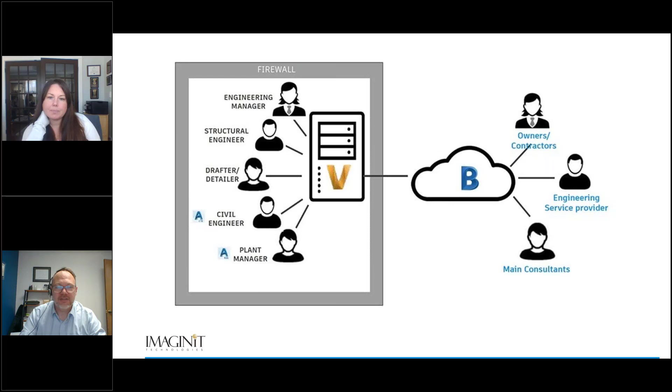We're not going to get too deep into the how of that, but that's the idea behind it, is we're linking some of this together. Now, another tool that I'll be leveraging, and it's just a feature within the Autodesk platform, within Inventor, is this idea of AnyCAD.

If you've heard of AnyCAD, it's the idea of bringing in maybe a SolidWorks file, a Dassault product, or bringing in some Creo or NX, and we can link it in and not change the original format. So it's not an import, it's linking.

Interestingly enough, up to 2021, one of the pieces that was missing was linking to Revit. So we couldn't even bring in other Autodesk products. We could bring in all these competing ones, but not Autodesk. So with 2021, we have the idea of linking Revit files in.

And this is, I can work with them, and that's part of what we're going to show, is how we're going to leverage this, bring this in, and begin working with this a little bit. So that's going to be a key piece for me.

So we're talking about a lot of different tools here, and I wanted to make sure we had a... okay, I'm going to step back, I'm getting too far ahead of myself. So what we want to do is walk through kind of how this would work, and it tends to work in a lot of places that I've seen. So I'm actually going to stop my webcam because we're going to get into some of these different pieces, and I don't want to distract myself as I go here.

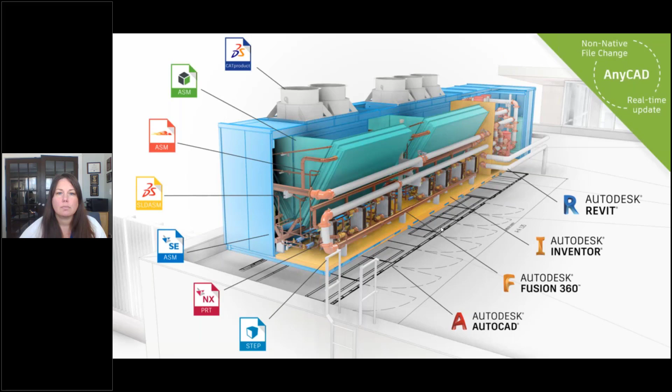But here's what I'm going to do, this is be really common. The role I'm going to play is a manufacturer, and I come in and check my mail, and Adrianna has sent me this. She says, hey, good morning Caleb, I've got a cabinet that needs to be customized for a project. Let me know if Caleb Designs can give me a few options. You can find a partial 3D of the office here.

So I'm going to stop there for a moment, and now I'm going to share my desktop, bring up and take a look at this file. So this is really common, right? The way that this workflow would typically go is it starts out in email, something goes along. What I would expect would be a PDF file, and that's probably the most usual way that these things get shared.

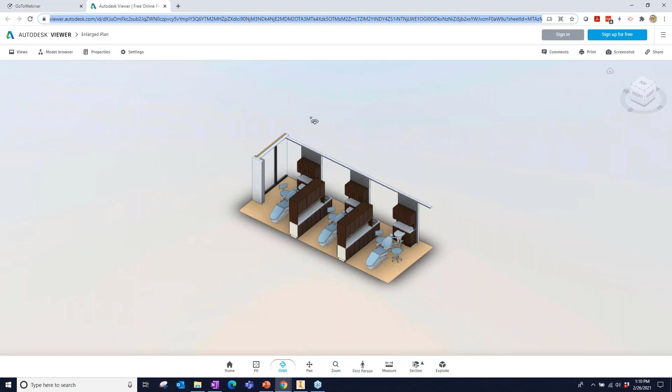But I'm going to drop out of this a second, and I'm going to pull up that link that she sent me. And yep, I'm still sharing my screen, I just want to make sure. I'm going to pull up the link that she sent me. And this is Autodesk Viewer. So she created a shared view within Revit, and now I'm in here taking a look at the Autodesk Viewer.

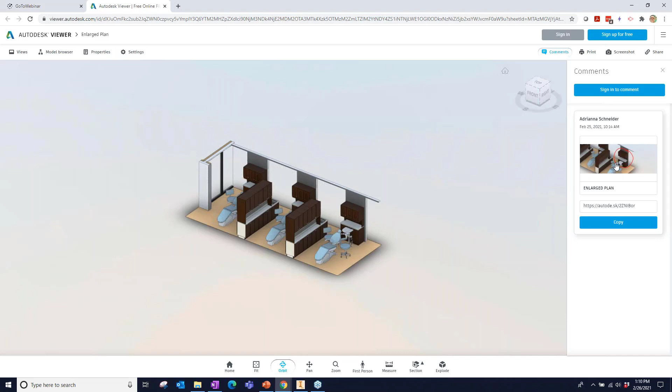Now, in the email, she mentioned the outlined in red cabinet, and if I take a look, I'm not seeing an outlined in red cabinet, but if I go over here to my comments, I have a comment that she's created on here with, sure enough, an outlined in red cabinet. So this is what I want to focus on. This is the area that I'm going to kind of take a look at. And as a quick pass, as a, hey, we want to start examining this a little bit, and do you think you could build this, and this is what I want to show you.

This is a pretty slick way to do that. Now, when she exported this, she also gave me the ability to come in and grab some dimensions off of here. So it is possible that I have enough information here to begin giving a quote for something like this, right? I mean, but if I take a look at this, I might want to be a little more precise.

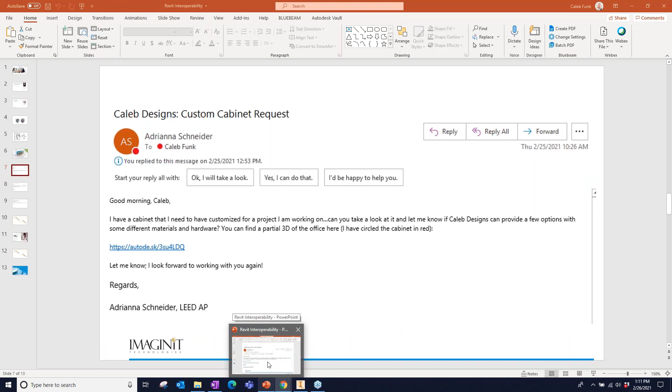Instead of looking at this, you notice all these are approximate values, and I'm clicking close, so I'm getting close. I get a sense of this. This is good. If I wanted to, I could go ahead and comment back and pass that information on. But instead, what I'm going to do is come along and say, you know what? That sounds great.

But Adrianna knows all about BIM 360 and all those things, so she says, you know what? I'm going to give you access to that BIM 360 site. You're good, let me know if you have trouble. So now I, as the manufacturer, can leverage BIM 360. I can link to it with my Vault. And again, broad strokes, we can get back into it later, but we can link into it and begin to pull that out.

So this idea, this workflow that we have here, is what we're going to be working with and a little bit of how this is going to go. So Adrianna, I'll have you talk through the idea of the architect, what you would do, how that would link to BIM 360, and I'll talk about pulling it into my side.

Yeah, so we're currently in design. For those of you familiar with BIM 360, I'm utilizing BIM 360 Design. I'm able to publish my project file over to the document management side of things and share that with Caleb, actually give him access to that BIM 360 file so that he can go ahead and download it. It's that straightforward right now.

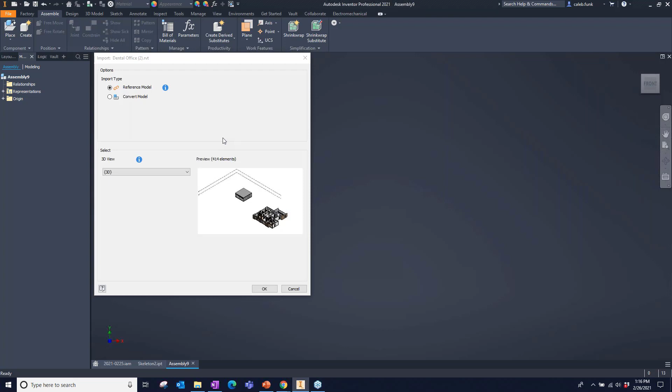As we go through, you notice I can reference the model or convert the model. What I want to do is reference that. By referencing it, I'm maintaining a link to it. And this is true of AnyCAD across the board. Reference is how we invoke AnyCAD. It's not a button I can hit, it's not something I turn on. It's just by referencing it that I get to use that feature.

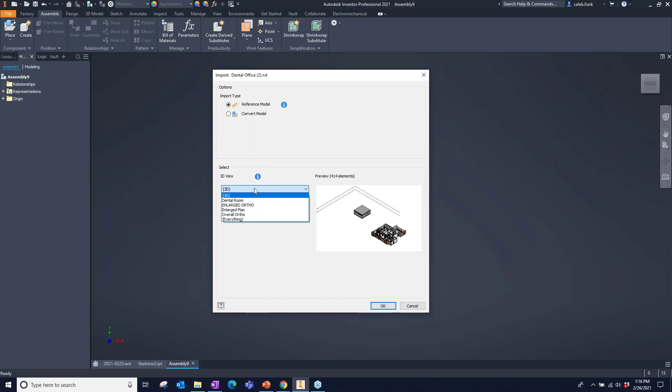As I go through and take a look at these different views that I have in here, Adrianna was kind enough to give me one of these, so I've got a simplified version of that. It tells me you've got 414 elements in here. You can load that in. As a manufacturer, I am most likely concerned with one area of this building, one component.

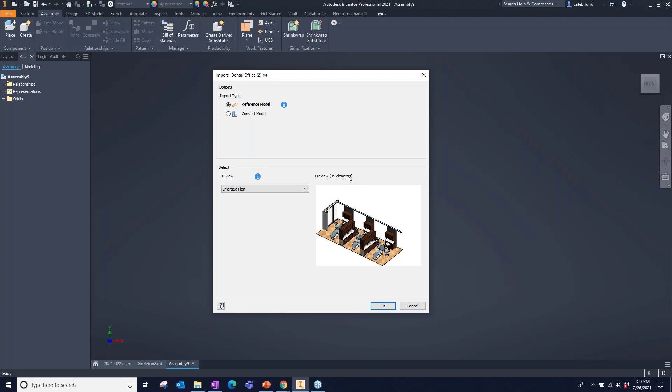Now interestingly enough, some of our colleagues are doing a larger system-wide integration, talking about Revit and Inventor. This is more of a point product type of thing. So there's a whole dental office - I do not care what door she's using, I do not care about any of that. What I'm looking at is just this idea.

So she was kind enough to give me just that view. That's a view generated in Revit. I can get right down to that view, and I'm going to bring it in. Now, one thing that always surprises me about the way AnyCAD and Inventor work is how quickly it imports this information. It's a lot of info, and it brings it in right away.

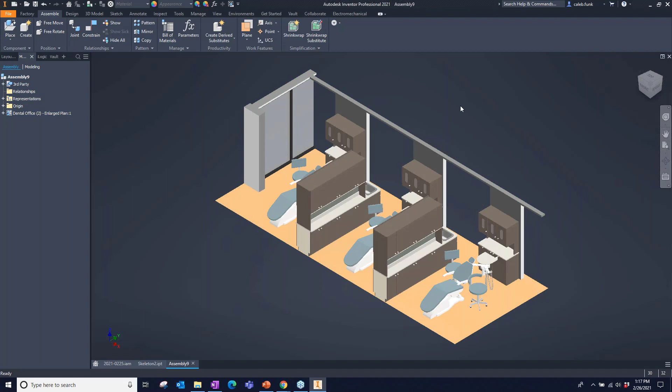I'm just going to kind of drill down here a little bit. Like I said, I've been doing this for years and it still impresses me. I enjoy it so much when I see things like this. It's bringing in each of these different areas.

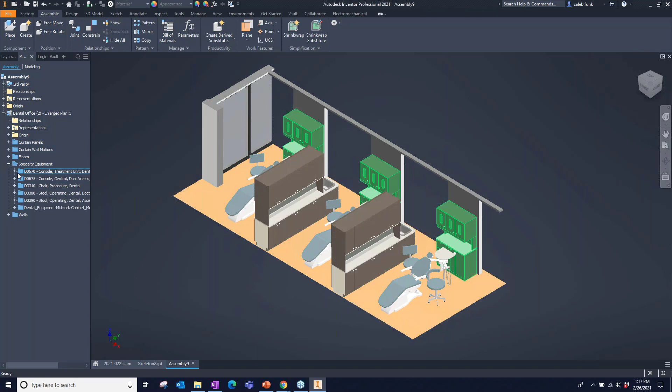Adriana, I'm not that familiar with Revit - in Revit, do these show up as different folders within Revit as well? So it's not really how it works in Revit, but each one of those is its own individual component, its own content, yes.

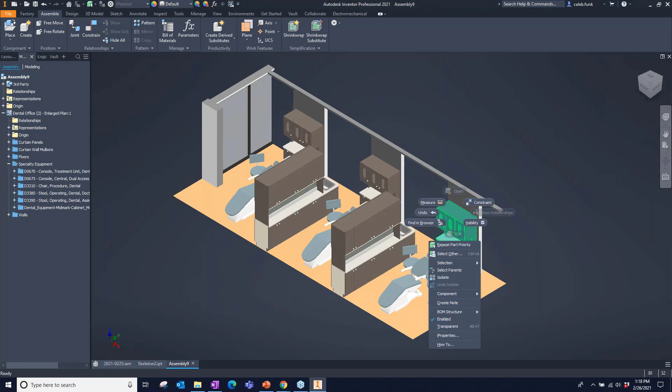So I can drill down to the individual content, the individual pieces that I have in here. And all I'm really concerned with is one piece, right? So I'm just going to real quick say, you know what, I just want to go get this one part. And I'm just going to kind of cheat a little bit basically and say, yeah, get rid of the rest. That's all I'm concerned with, I just want to look at this one component. So I could use the tree, turn them on, turn them off, and view that.

I think it's interesting that Revit doesn't have those folders and that this is somehow magically working within Inventor. I applaud Autodesk on that. I think that's a great way to access that information.

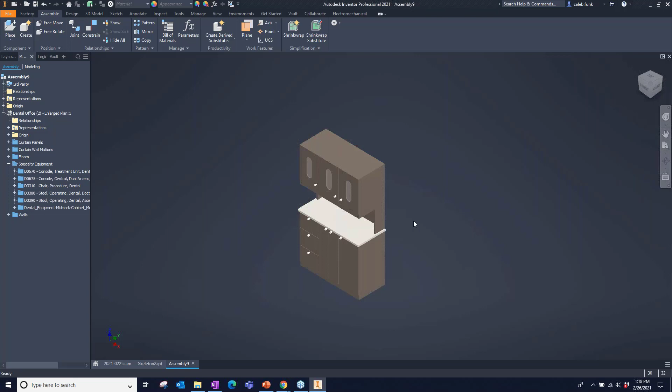Now that I have the content, what can I do with it? And that becomes one of the beginning questions of, how do I even - it's here. It's one kind of chunk, I guess, from Revit. In Revit, this would be a Revit family. So it's a piece I have in here.

Well, I do have all of the simpler things I can do where I can come along and measure pieces off of it so I could get those precise measurements. I could at this point create a drawing from this and pull measurements off of it that way. One thing I think is kind of neat though is that I can use this if I want to begin doing a layout of this, if I want to borrow geometry off of it, whatever it's going to be - I can do that fairly easily.

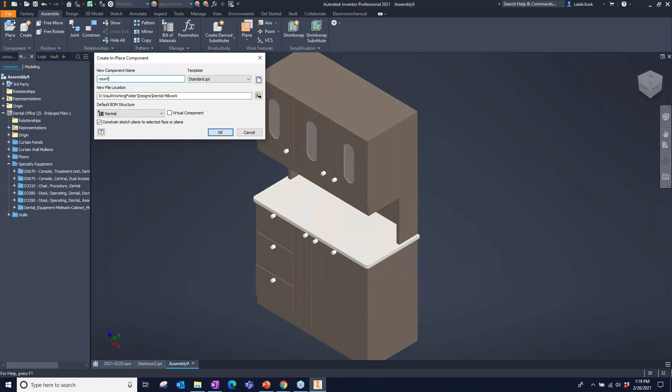So if I come along over here, I'm going to say I want to create - and I'm going to create a countertop. Helps if I spell it right. So I'm going to say yeah, I'm going to go ahead and create a countertop out of this. I can work right in position here, so I'm going to go ahead and do that. Create a sketch on it.

And now it's going to act like any Inventor part that I've brought in. So at this point, this is completely as if I'm working right within Inventor with any other component that I have. I can now project the geometry off of that - let's see if I can grab that whole thing at once. I can project the geometry and begin building components.

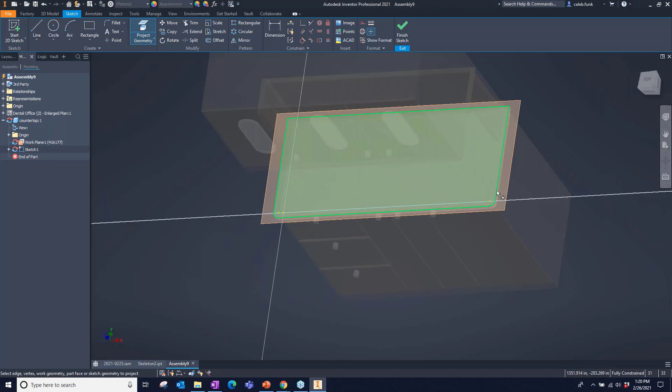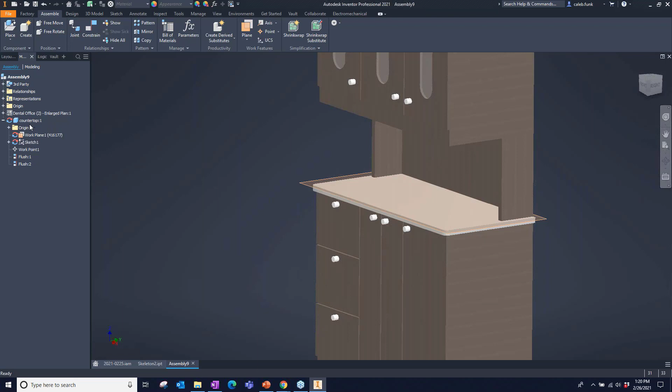In this case, I'll take that and extrude it. I can go grab that underlying layer, and on top of what I have, start building the different components so I could send them off to nesting and manufacture them. I can work right down the line and build its own separate piece.

Completely leveraging the Revit geometry that I have. Now I'll get a little deep in the weeds. You might have noticed that geometry, when I borrowed it, was yellow. It wasn't standard, it was linked to that component. If the underlying Revit geometry changed, I could update it and watch the change in here.

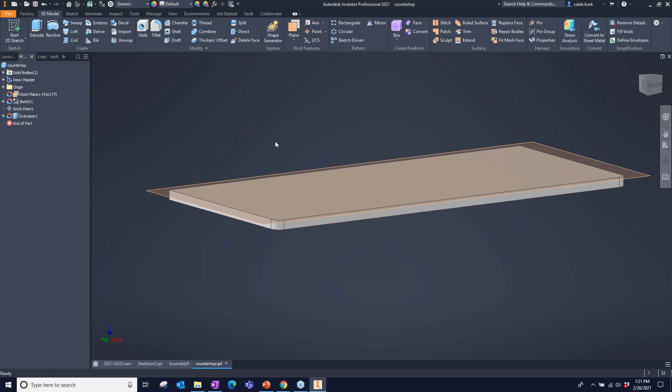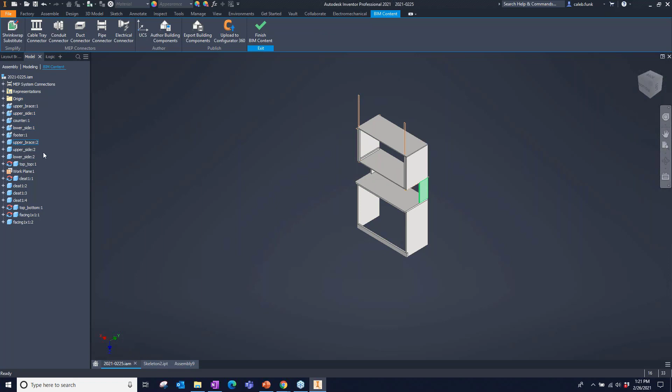Now I'll throw a couple other quick things at you about working with this. In this case, I built this part right on top of what I had there. Realistically, if I'm going to work with this, I want each of these pieces to be a separate component, with all of these little separate pieces, so I can begin constructing off of that. Let me step back and give you an idea what I did.

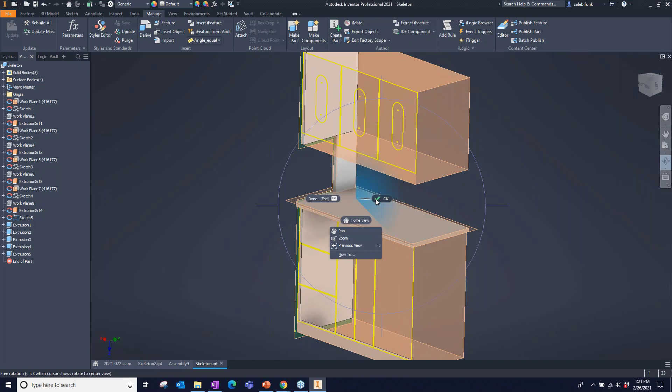If I can find my skeleton, here's what I did. I took that basic cabinet that was there and created a whole bunch of surfaces off of it to use as a master model. Once I had those, I could take it in here, begin pulling pieces off of it, and now I'm kind of finishing it out.

I've got my toe kick where I'm putting in different cleats that I'll have as part of this. I have my nail backers, I'll be putting in my doors, my different pieces. So this is what I would need to begin manufacturing this. I've got it all laid out, I've got my pieces, I've got my bill of material information that I can pull off of it. And all of that came directly off that Revit model.

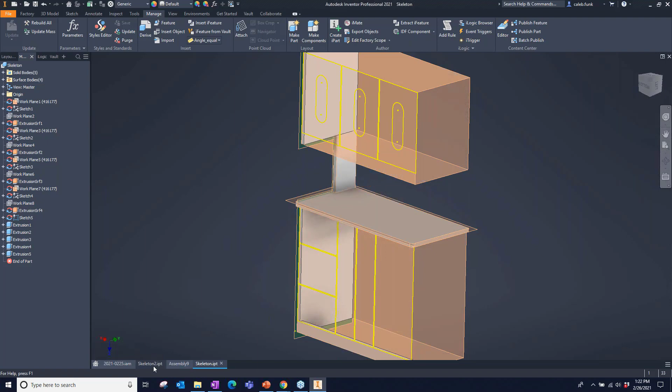In my case, I started out just borrowing those basic sketches so I could create the rest of the information. However, once I've gone through and created all my custom information, send it out to nesting, send it out to WoodWOP or whatever I'm sending it out to, so I can begin generating my code and cutting these up and assembling them, that's Adriana doesn't care.

What her concern is, she wants that information placed back into her model. She's like, this is a custom one I'm creating, she had a placeholder, I've now gone through and built it up, and I want to send this back to her. So there's two sides to this: one, I'm able to leverage the existing Revit information to build my stuff. But two, I want her using my models. It's a great way to begin building that relationship, like, yeah absolutely, let me get you that model.

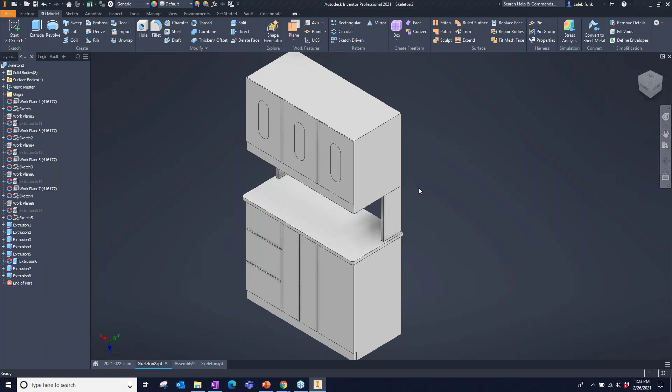Again, I'm just going to leverage what exists today within the Inventor tool. This has been around for a while, a series of things I can access, and I can send this across. So what I'm going to do is take a look at the environments, and I do have a BIM Content Environment.

This has been around for a little bit. If you've ever clicked on it, even accidentally, you come in and you're like, what? Duct connectors, pipe, electrical, I don't know what this is. Most of this, unless you're specifically building something that interfaces — and I mentioned our colleagues doing more of a system thing, they're going to have devices that link into building systems, that becomes useful then — but in my case I don't care. This is going to sit up against the wall, it doesn't have to have duct connectors or conduit connectors.

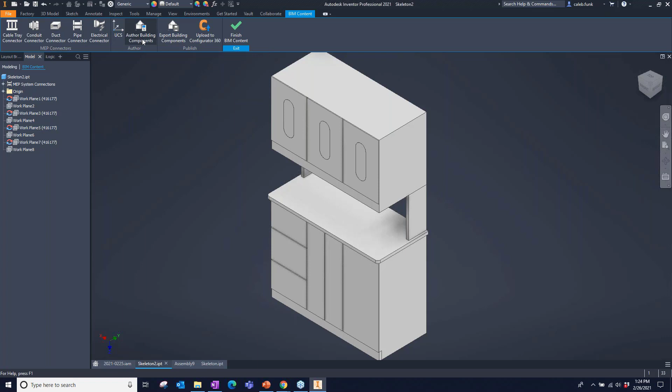What I am going to do is position it — actually I'll position in a second — I'm going to author this as a building component. So I'll say, all right, we're going to set this up. And then this pulls up and gives me a couple of different things here.

So when I take a look at this, I get to give it a 0 point, and this to me is key. If I give you one tip today when creating information that's going to end up in Revit: Revit has a different XYZ. Sometimes the Z is always up; a lot of times when we're working, the Z is out toward us. When manufacturers are working, when Inventor guys are working, the Z comes out toward us. So a lot of times I have to reposition that, and I can do it with the UCS, I can do it with what I have here.

The other key thing I can do is come along to this OmniClass — I vaguely know what it is, it's a way of understanding how. Is this keynotes? What does this end up being, Adriana, on the other side?

No, that's the OmniClass number. What is the OmniClass to you? For me, I'm picking it from the list, which is great. But what's the OmniClass on your end? Does it go into... it could be incorporated into specifications if necessary.

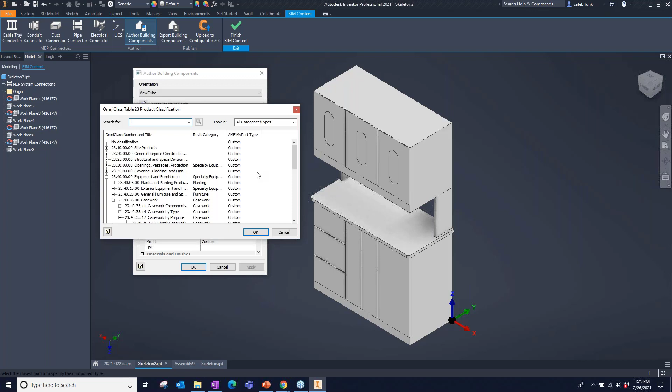So this is basically the spec that I'm giving it, and I'm defining that the spec I have is going to be a dental casework. Part of the dental casework spec, I've got my dimensions that I can plug in, my description information, finishes that I want to put on it, simple things like that. I've got some of this information in place, and now all I really need to do is export it.

So author just sets up all this information. That's what I'm doing, I'm defining it, and then I can come along and export it. What export allows me to do is take this information. I've done it once. Give it my code here, 210226. I can then take that information, and when I save it, it saves it as a Revit family.

So a Revit family, and I'll have Adriana explain a little more in a bit, is how stuff gets put into Revit, right? So this isn't, there's the idea of saving it as a Revit file. I effectively am, but it's a very specific one.

So I'm going to go ahead and save this out. And away it goes, and it goes through and does whatever magic it needs to in the background to create this Revit family. But it takes my Inventor information and puts it into a format that can easily be brought into Revit and understood and worked with within Revit.

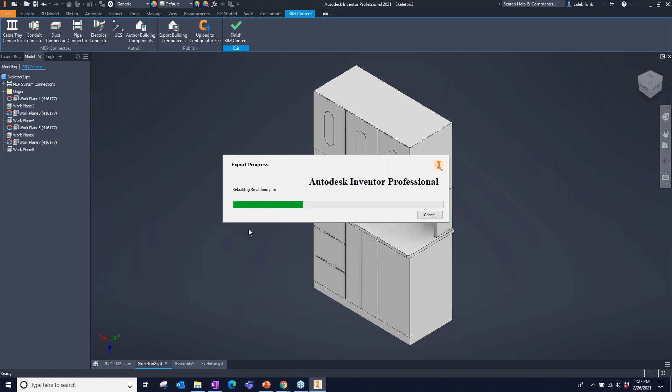So I'll let that run just for a second here. I am going to grab my vault, because ultimately I'm going to take this file and place it over in my vault.

I can see, yep, that sounds good. So just click, it says, hey, look, this was fine. Do you want to take a look at your translation report? And I'll say, sure, let's go ahead and take a look at it. So this just describes what I did, the information that went out. Are there any parameters that went along with it? Basic information. Anytime, if you've ever translated anything with Inventor, it's the same translation report we would always see.

So I'm over here, I'll log into my vault, and I want to check this information into my vault. Now, since it's a Revit family, I don't have a direct integration. I can't do it from my browser, right? I can check this file in.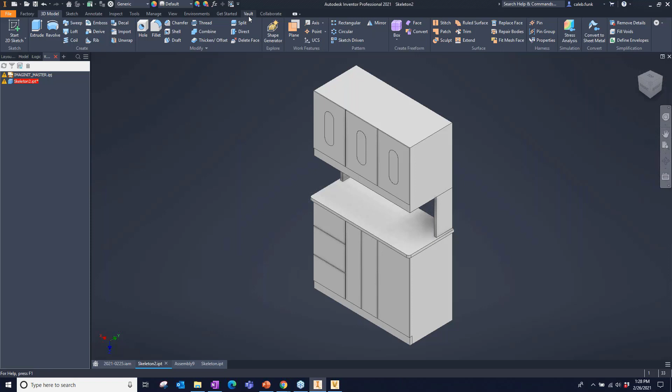Where's my vault content? Let's finish my BIM content there. There we go. So I can go ahead and check this file in, but it's not going to check in the components that go along with it. I need to log into my vault here real quick. Yep, sounds good, so I'll just do that separately.

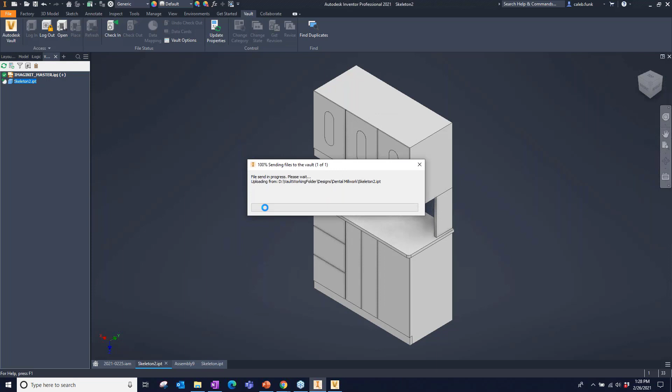And the reason I'm checking it into my vault, I'm not even really going to manage it, but since I have it linked to the BIM 360, I'll save it, check it in, please. So there we go. That's where the handoff is. I can then shoot off an email, say hey, I checked it in, check your BIM 360 site, it's going to be there. I don't have to pack it up, I don't have to email it. It'll just be available as part of that.

So while I have that folder over here for that, let's refresh, that dental casework folder is over here. The dental millwork, I'm sorry. I've only got the skeleton as part of that. I'm going to go ahead and add in that file and just drop that RFA in there for her. So we'll grab it, sounds good. There's the RFA, gets added in.

And it's going to tell me it can't do it because it thinks it's linking in a Revit file. So that's fine, I'm going to cheat for a minute here. And then I'll check that in. So I'll add that file in.

Sounds good. So once I add that in, I'll let BIM 360 kind of pick it up from there. There's a link to that, and that's something that we can set up.

It's one of our administration options where we can go through and set up the collaboration link where we've got cloud drive mapping. I'm not going to get too deep into this, but we can go through and take a look at how we can link cloud drives to that, configure the settings and when it's going to do it.

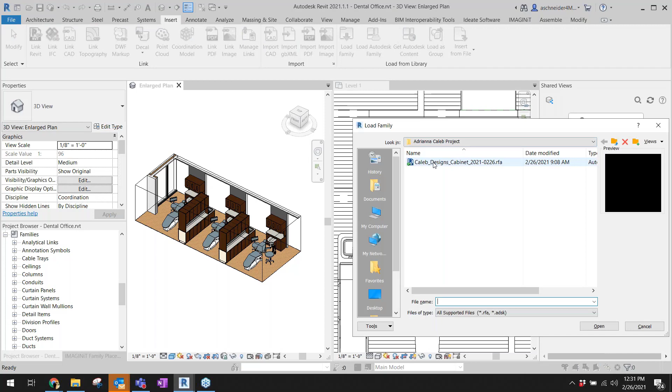So absolutely excellent, loving it. Now that everything's updated, I can go back into Revit. I can simply load the family and bring that in and position it where it needs to be.

So casework, and this is another piece of this too, right? So if I'm going to open it up first and then we'll take a look at it. I'm just going to drop it in here.

So the family itself, basic functionality, basic components, parameters of a Revit family: the dimensional information, finish, model number, manufacturer. Here's the OmniClass number and the OmniClass title, right? So this is kind of that initial stage where, okay, I just need to make sure that the dimensions are correct.

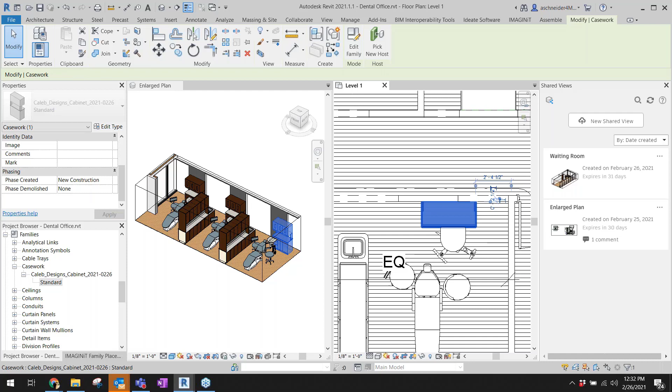I'm going to go ahead and move it over in front of the wall here. I want to make sure that within my 3D view, I'm looking at both of these. Yep, they're pretty standard, straightforward, and there we go.

Now, one of the things that in the past has concerned me about the integration between Inventor and Revit is the fact that this is not a parametric object. But let's talk a little bit about the workflow of an architect, the workflow of how we really want to

add components, right? We want to be able to, especially early on in schematic design, know that we have a simple piece of geometry. One thing that I always want to make sure once I get the content back from Caleb or any of my manufacturers is the size, right? We want to make sure it's small, it's petite, not too clunky.

This is absolutely fine. But initially, I just needed to stick something in there. It's going to look kind of like that. Then once it's time to actually do my specifications or my FF&E, I have the ability to work with my manufacturer to get the specific materials that I want, the hardware that I want, and all of that data and information, which again, this is the beginning parts and pieces to it, right?

We can add additional parameters that can then be populated from the Inventor model, data and information that we can bring in ourselves as well, right? Utilizing some of our Revit utilities that allow us, the family parameter manager, to add bulk family parameters into a Revit family. So it's quick and easy to be able to do that.

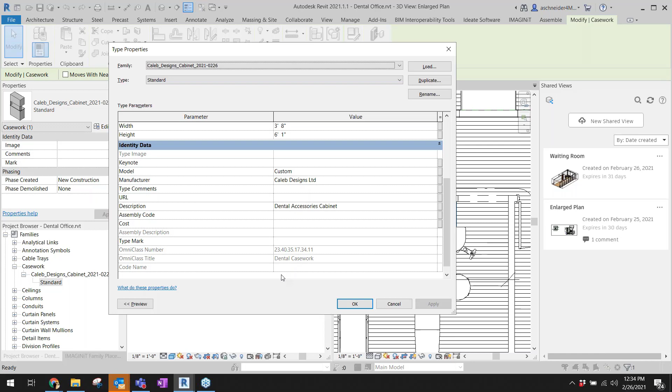So our schedules will populate the way that we need them to. So the whole concept of having a parametric family—once we've established the specifications that we need from our manufacturer, it no longer needs to be parametric, right? It can be a stagnant family because it's exactly what it is that I want and what it is that I need.

Now, in a schematic design phase, I want to be able to change the size, the materials. That's when we're going to be doing those things. But once we start getting into the finality of our construction documents, we don't need to have that parametric tool, or the parametric change engine.

That's something that for a long time bothered me about that integration between Inventor and Revit. But just like Revit, and what I constantly say all the time about Revit, is it is a workflow change. It's not the way we used to do it, the way we used to work within an AutoCAD environment. We have to change our processes and our ways to be able to work the way is best with Revit.

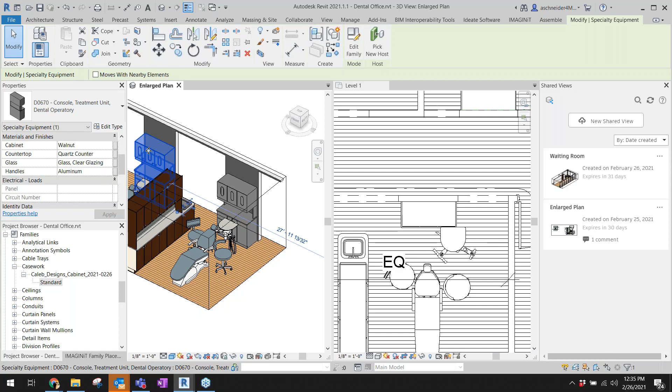So I now have the project continue to be in BIM360. I have my family that I got from the manufacturer that he was able to link from his environment to BIM360. And now we can start moving forward, maybe start taking a look at things like differences in materials, maybe some renderings and things like that.

I have a very small piece in this one. Yeah, no worries, and that's part of the reason we looked at what's to be continued, because there's a lot more that could be done, a lot more that could be put out there. But I'm a big fan of looking at a workflow in a simple way, like how do we get it from A to B? And this is exactly what we're looking for.

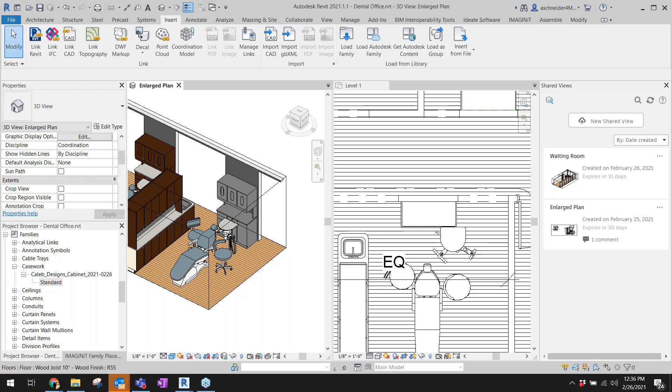I just wanted to pull this one back up. Go back one. This is what we were just talking about, right? When we first put this together, when we first saw it, it's a lot of steps that we're looking at and all those different pieces. But here we were able to run through that in something like 30 minutes as a simple version of it, importing the information, creating some geometry.

This flow from one to the other is pretty key for how we can begin leveraging that back and forth. So for this one, the idea would be, I'm a manufacturer that creates a particular product, and I want to push that product so that an architect can leverage it in their design. To Adrianna's point, we've got a product line that can be a Revit family that's parametric, and we want to be able to switch it up so it's several different sizes.

Right now, that is one limitation of Inventor. I can't send out a Revit family that's 5 different sizes. I would have to have 5 different Revit families. If that's really the key, if I've got casework that comes in 10 different sizes, and I want to give Adrianna a family that has 10 different sizes in it, I would probably leverage Revit to build that. I might start with some Inventor models, bringing them in, but then ultimately it would probably be built within Revit.

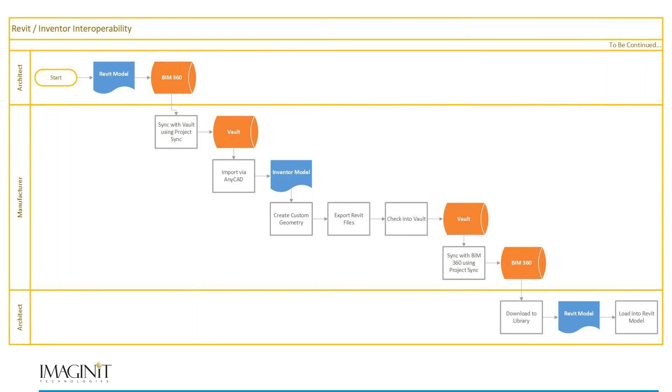Absolutely, so that's the big broad picture that we wanted to show you. And what we want to do, a lot of times when I say hey, you can do this thing, it generates more questions than you do answers. So we do want to open it up to Q&A, but we've got a couple questions for you.

We keep talking about this idea, we could do this, we could do that. What do you want to see next? The idea of leveraging some information to build multiple Revit families, adding materials, there's a lot of different ways we can go. And of course, we have some ideas, but it'd be great to hear that. And we're both super curious: do you see value in this workflow? Is this something that you would hope to work with?